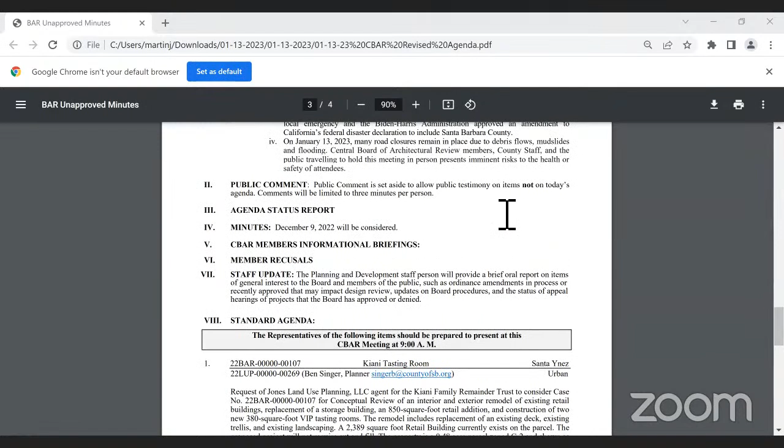Well, okay, so public comment. Do we have any member of the public who wishes to address the board regarding an item that is not on today's agenda? Please raise your hand if you have a public comment for anything not on today's agenda. I'm not seeing anybody.

Okay, can we do the agenda status reports? We have received no request to continue. Okay,

Let's take a look at the minutes. I'm pretty sure I can share my screen for that. One second. And while you do that, I'm going to see if I can track down Lisa.

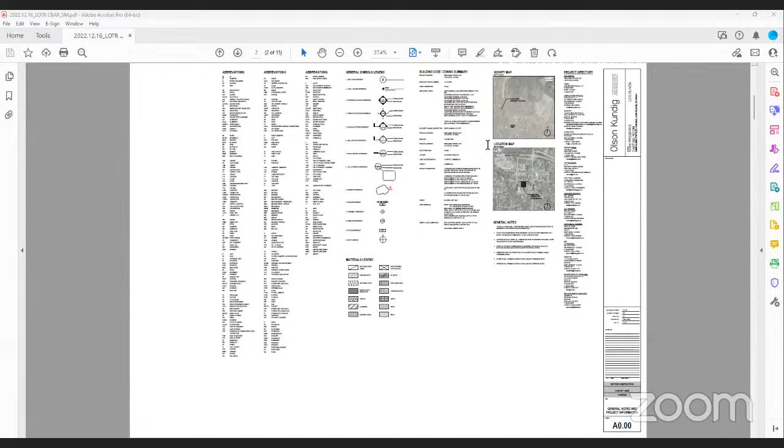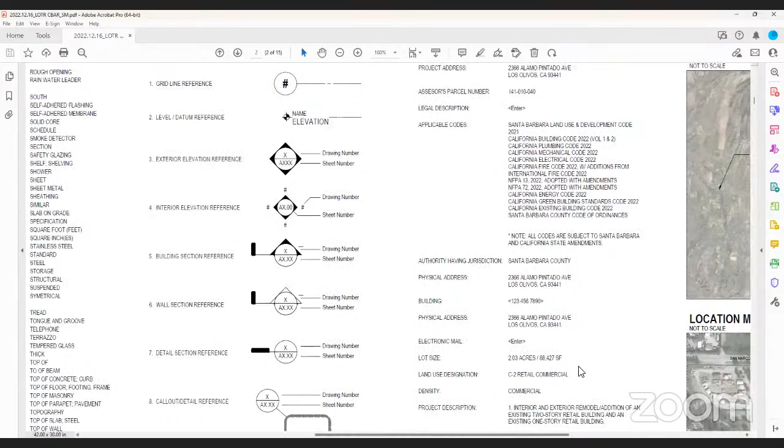Will do, thank you. All right Brett, take it away. I think Brett wants me to speak. I'm Edward Lalonde, principal and architect here at Olson Kundig, so we're working on the design of this project. If possible, maybe zoom in to the vicinity plan, that second map, or sorry, the location map rather, just to locate this project for those of you that maybe are unfamiliar. Brett gave a pretty good introduction of its location. We're dealing with two buildings here, and maybe to speak to one of the comments last time, if you advance in the deck, or when you're ready, advance in the deck. So there's our Alamo Pintado, yep.

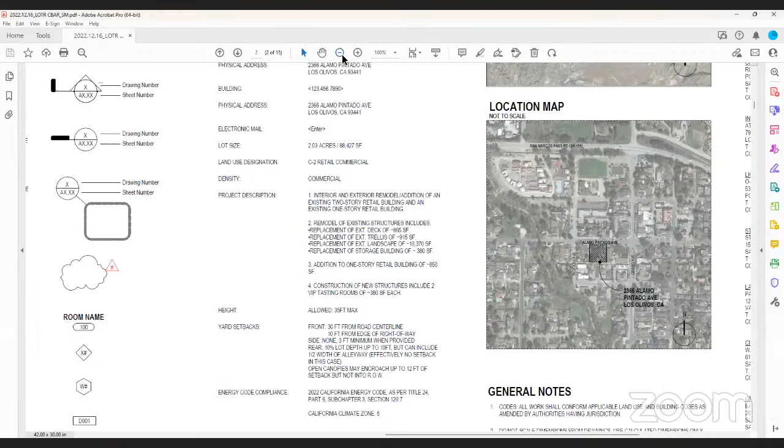Okay, let me zoom back out and we'll get one more. There we go. And as Brett said, we have made some additions. This shows the existing conditions, just for context, of the building.

What we're proposing is a tasting room on the east, and then the west will be a sort of deli cafe function, offering dry goods and things like that from the Kiani Preserve, another project our office is working on. The tasting room is for the winery program.

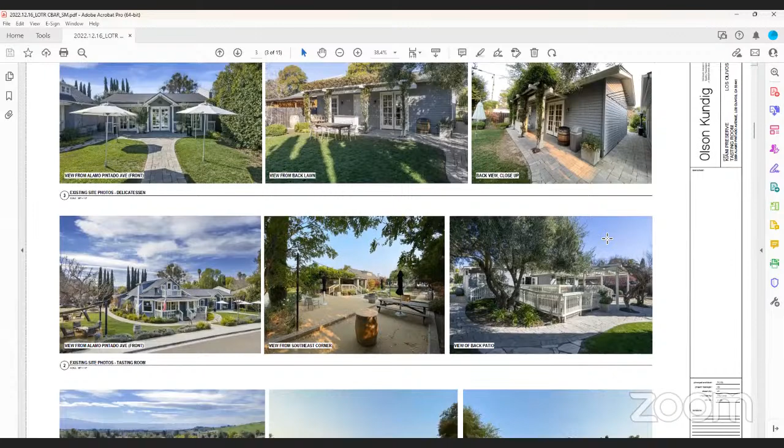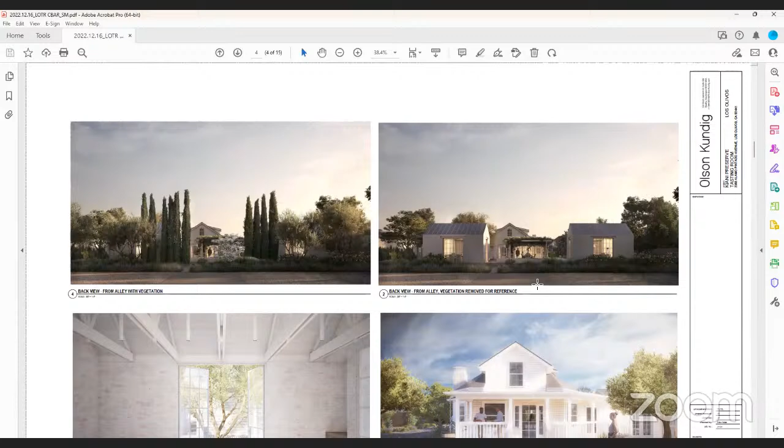In terms of aesthetics, and we do have a material palette in this deck, we're proposing painting the buildings white—they're blue right now—and painting the windows white as well, so it's a very subdued presence on the urban scale. The additional buildings in the backyard against the alley will be painted brick with a truss roof system, and something like a galvanized or zinc standing seam roof.

Again, this is conceptual, so the design is evolving as we speak, but this is what we're proposing. There's an intense landscape program, which we'll walk you through in a minute.

Just in terms of the concern of the glazing, we are glazing those buildings minimally for daylighting and also so patrons can experience the gardens. As you can see from the illustration on the upper left, those are largely blocked by plantings, existing and proposed.

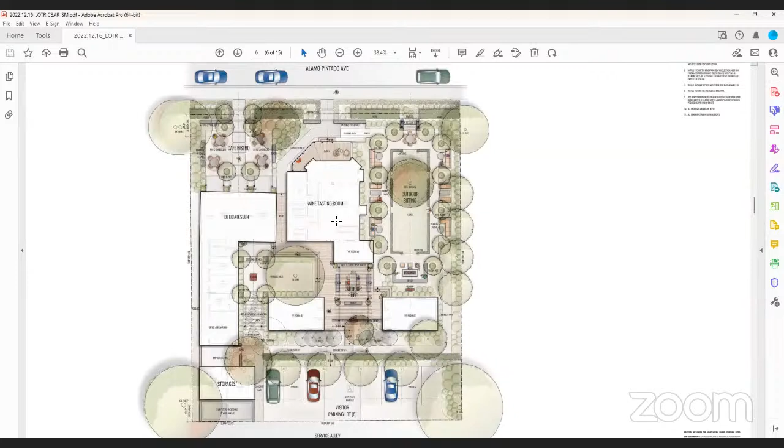Do your architectural site plans show the difference between proposed and existing? Oh yes, thanks for reminding me. If you zoom out, I meant to actually start there. Let's go to the architectural plan, flip through or advance through the set here. This shows some of the planting concepts. And we can flip back here if we like.

Okay, do you see the key plan there in the far right, in the title block? Over here, yes. If you're able to zoom in there, this shows in dark gray is the existing. Let's see, shoot, let's do this. I don't know why I drew a square, but there you go.

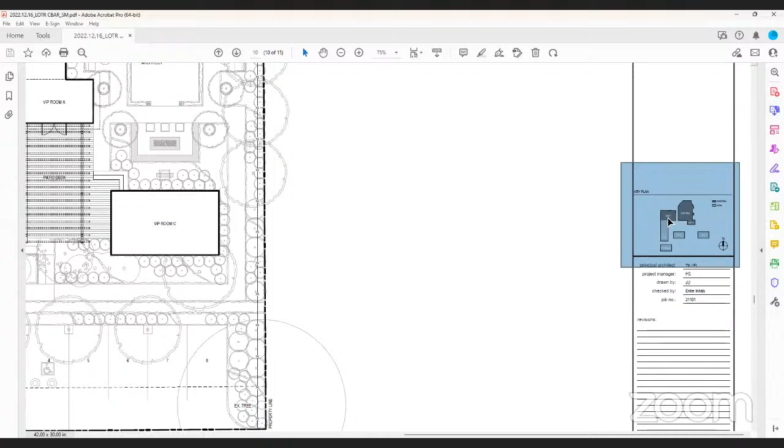So in the light gray are the additions. Okay, yeah, so I apologize, I meant to start there. This portion of the deli is existing. The wine tasting and VIP A is already there, right? Yes, okay, all right, let's zoom back out.

And we are looking at the entry awning of the deli. Next time we come to the board, we'll probably have a solution for that. That is largely driven by the need for septic for leach field.

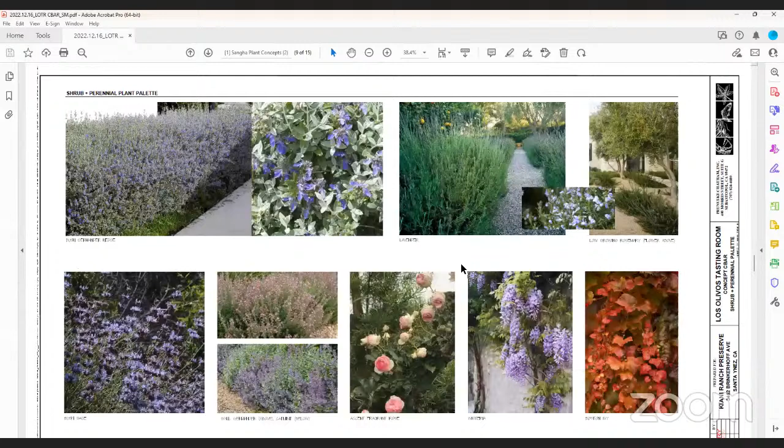Probably some citrus. And then here's the rest of the, yeah, a lot of fragrant plantings as well. Grapes. There's an existing grape that we're going to try to reestablish when we replace the trellis.

Do we have any quick questions from the board before we call for public comment?

I have a quick question, Bethany. Yes, Denise. Hi. What is the tree that will be removed? There's a large, that large tree is, I think it's a pepper tree now. And this is still in discussion, actually. We're looking, I believe it's going to be replaced with a persimmon tree. Or walnut. Any other questions, Denise?

Just real quick, is the south parking lot considered to be sort of a minor entry to the campus, to the wine tasting garden and all of that? Yes, it is a secondary entry. That's the intent, that most patrons would be entering off the street. But there is still accessible access through that shifted axes ramp, concrete path onto the deck.

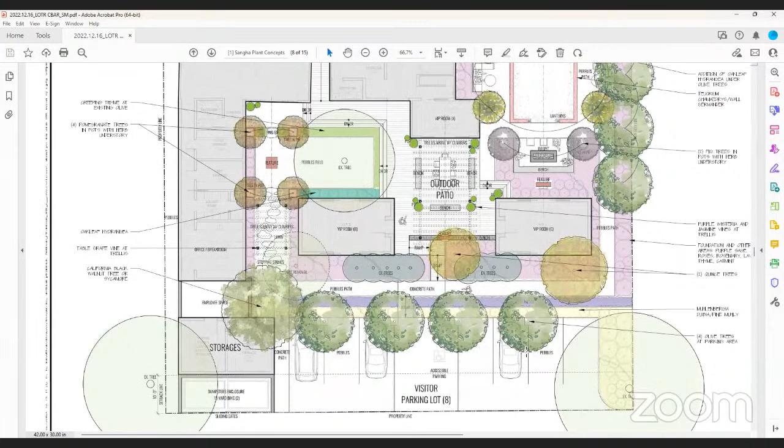Any other? Yes, Cass. Is it the existing Italian cypress? Is that the gray existing trees? Is that them there? Yes, that's correct. And they're staying, all of the Italian cypress you're intending to keep? Yes, we are. And then also, could we go back and just see the photographs of the surrounding area, the context of the properties across the street and adjacent?

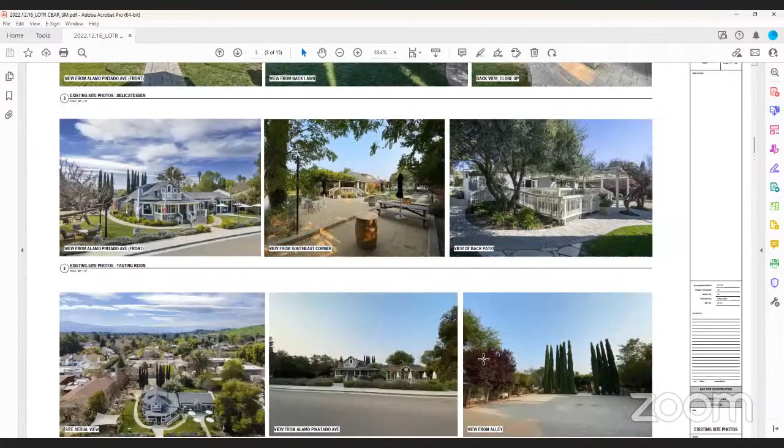I don't think we have that. Oh, we don't. Okay, there were these images. Is this what you're asking? Okay, yes. So this is adjacent here. Those are the Italian cypress in the back. This is the Grange, right? Yeah, I got it.

So the intent is, maybe you could confirm, this is open to the public and people can come in and partake in all these various things you have, the deli, et cetera, the wine tasting, and purchase whatever they want and then come out and be anywhere in the landscape. Is that the idea? Yeah, yes it is. Okay, great, thank you.

Anybody else? Board members? Okay.

Jonathan, will you do public comment? Did I lose you, Jonathan? If there's any members of the public that wish to make a comment on this, could you please raise your hand? I'm not seeing any. So I'm not seeing anybody indicating that they're wishing to speak on this item.

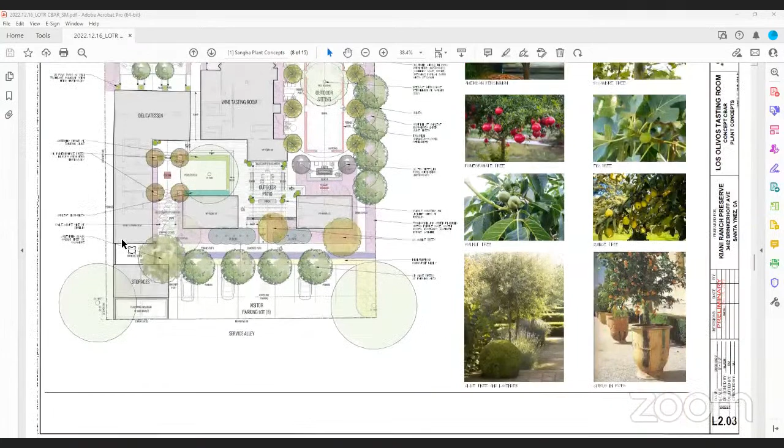I like the combination of a cottage and then some of the more contemporary elements you have, particularly on the south elevation. We are in town here, so we're not out in the country on top of a hill, so the light leak issue is not as much of a concern, but it is a concern nonetheless, so I'd just remind about that. But I think it's really nice overall - I like the direction you're going.

Thank you, thank you. Okay, Robin and then Puck. I concur with both Lowell and Cass. Okay, Puck?

Did we lose you, Puck? Sorry, I was having trouble with my audio and my Wi-Fi. Anyway, no, I think - I just concur with everyone.

I'm looking forward to this, and I'm a little on the fence about the white, as I feel like our town is sort of turning - every building seems to be turning white. But in this case, the way it's arranged and everything, I do like it. So looking forward to the next steps.

Okay, Denise? Hi, yes, I think it's beautiful.

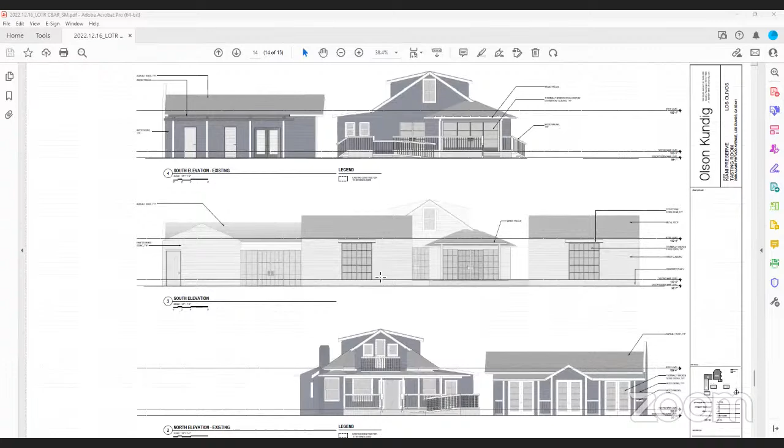It's such an improvement to what is there. One thing I will mention, though, is that visitors parking in that south parking lot might be a little confused about how to get to the front door. I see there's a little ramp and then an entryway, and then you can go around, but I'd suggest looking at whether the wayfinding could be improved a little from the south side.

Okay, okay, thanks. And Alan? I have nothing to add. Thank you, how did I know that? All right, Nicole, I'm going to try and recapitulate a little bit here.

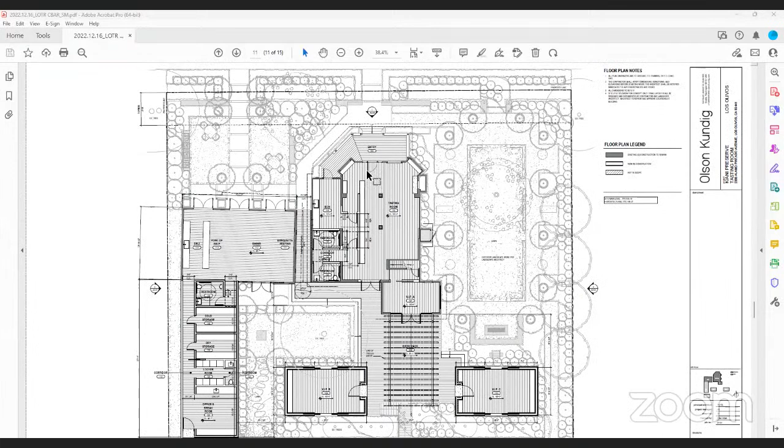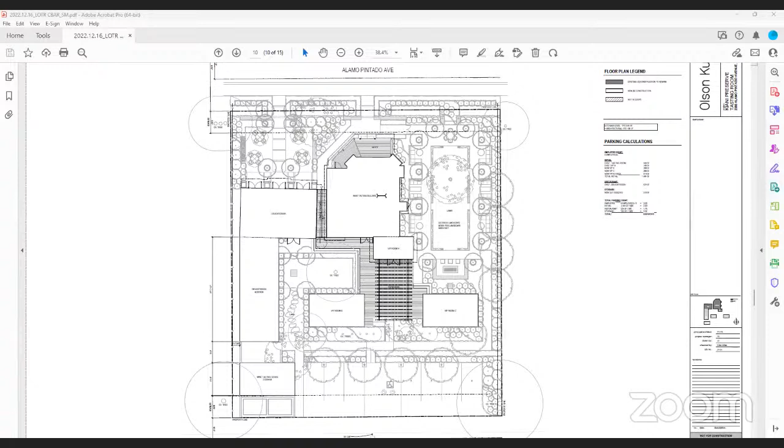There were comments about whether the hedge was perhaps too visually restrictive, making the project feel very private and not actually a business kind of a thing. That's my spin on what people said, adding some of my own comment in there. We appreciate the improvement to the architectural design, specifically the elimination of the dormer and balcony - it's kind of brought the building back to its roots a little bit, which is very nice to see. There's some ambivalence about the color, so that's just a general comment. I don't think there was any strong direction from anybody's comments, but just some concern, as well as some support, just to see where they go next.

Also keep an eye on your fenestration and the amount of light trespass you have as you move forward.

There was a suggestion to take another look at the wayfinding from the south parking area. I know the site offers some challenges, but there might be a better way to take control of that, make it more obvious and less visually restrictive, so people can see where they're going. That's always good with wayfinding.

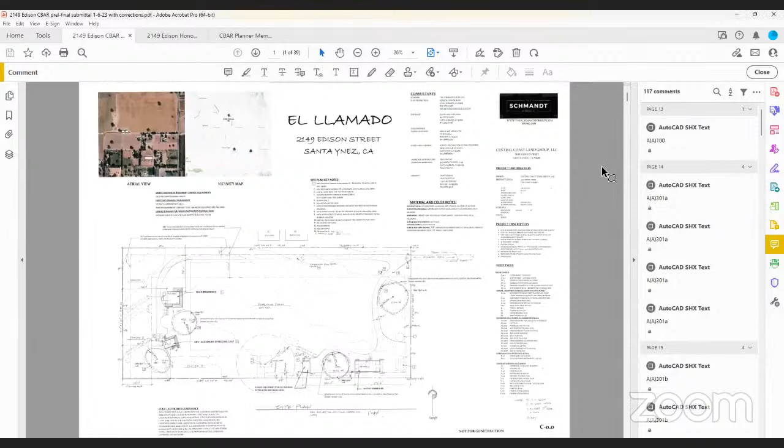Alright, so let's go back to that. We have somebody here for this one? Yeah, Greg Schmandt here. Hello everybody. So basically, we saw you about a month ago.

This is on Edison, an interior lot. If you want to zoom in on the aerial there — it sits back off Edison, there's a 10-acre parcel in front with an easement that goes back to this parcel. It's surrounded on the north side by a big ag property with two white buildings close by, which are like storage or something — and that's on the other property, correct? Correct.

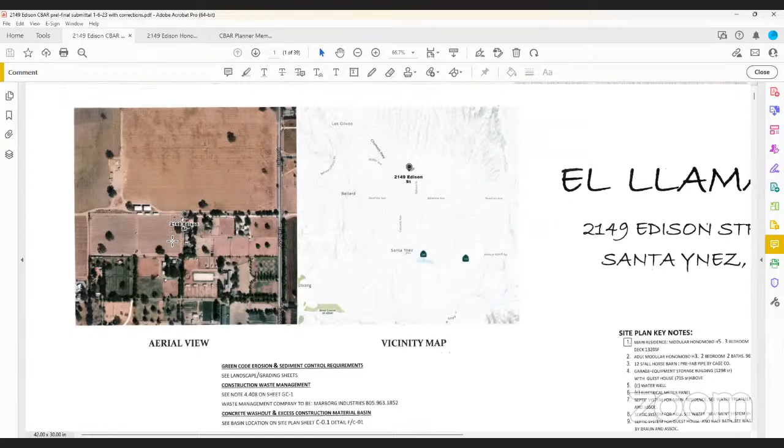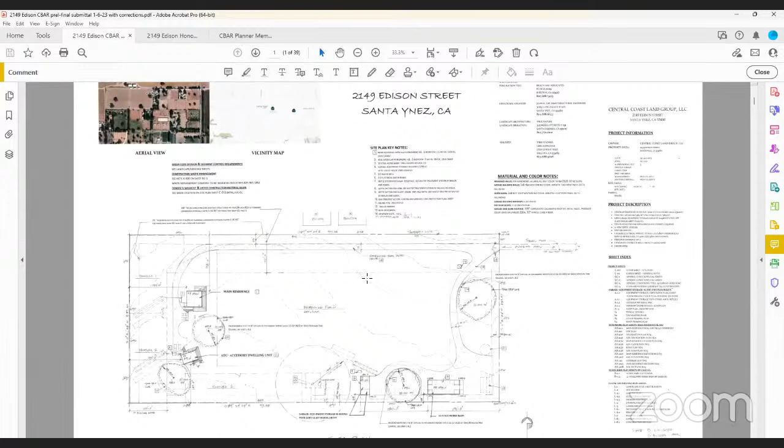So as you look at the site plan, on the north side, if you remember, we have a 25-foot vegetation buffer and a 100-foot no-build zone, which are depicted there. The two residences, or the two buildings, will be to the north side, to the west side — far to the west side — well off the property line, kind of surrounding the existing oak trees.

Okay, and then on the south side, there is a proposed 12-stall barn and a garage equipment building with a guest house loft. Correct — a little survey, that's a survey. And then here's the garage with the loft, guest house.

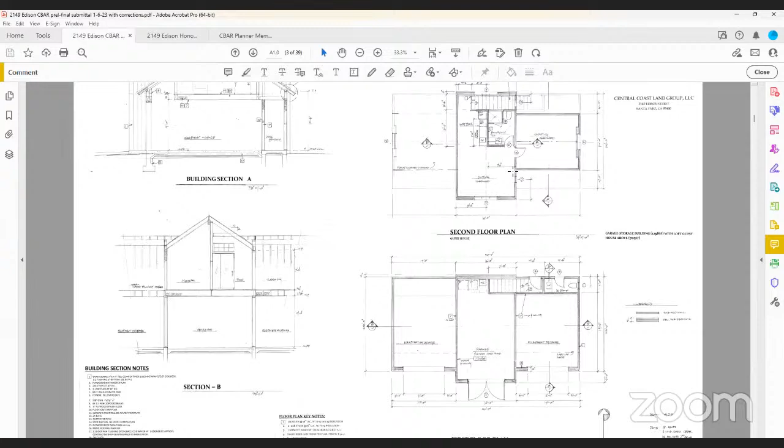Floor plans — basically there's open on the two sides of the lower level, kind of has a carriage door in the center one. Then above, it takes a staircase up, which is interior, and it has a little loft sitting room and a little sleeping area. Okay, and then the elevations are right there.

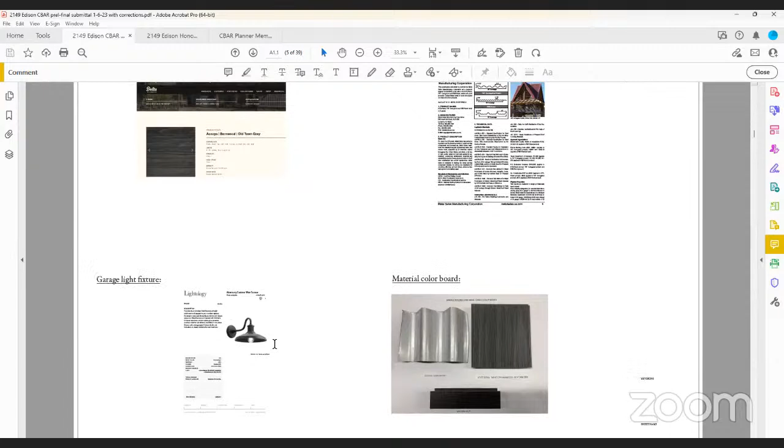So basically it's like a 1x8 tongue and groove. There's a material board, I think the next sheet, that's kind of a darker grayish color. It's actually an Accoya wood brand that we're going to use, so it's on the darker side, going with a corrugated galvanized roof, and it has bronze colored window frames — you see the lighting there. This will be the same color palette as the roof on the stables too. The two modular units — those plans should be coming up after all this stuff.

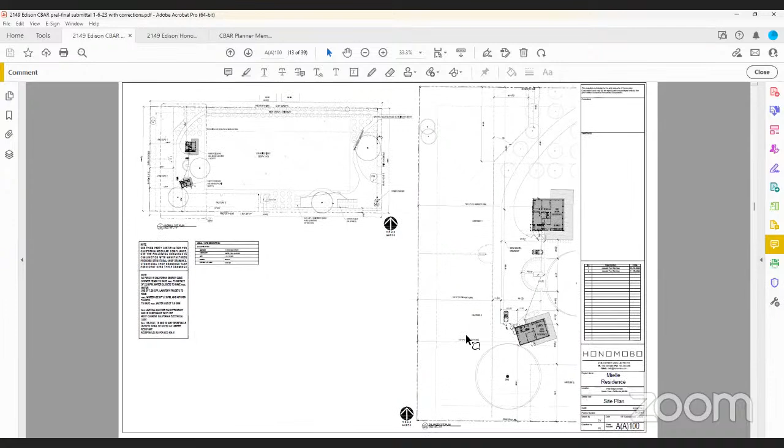So the one comment last time was needing some shade, or to look at shading options for the 2 units there. I believe Kim's the landscape architect, so we came up with a sailcloth approach, which is on L5, towards the end of all these sheets here. They give the deck area some shading. I don't know if we want to skim all the way down to L5.

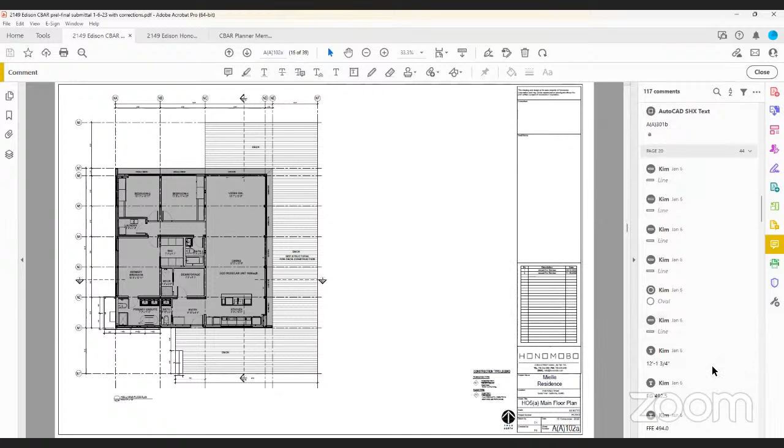Oh, they're not coming up. Oh okay, yeah, we could just, it's almost the last 5 sheets of the whole. For some reason the electrical plan got - there's the barn.

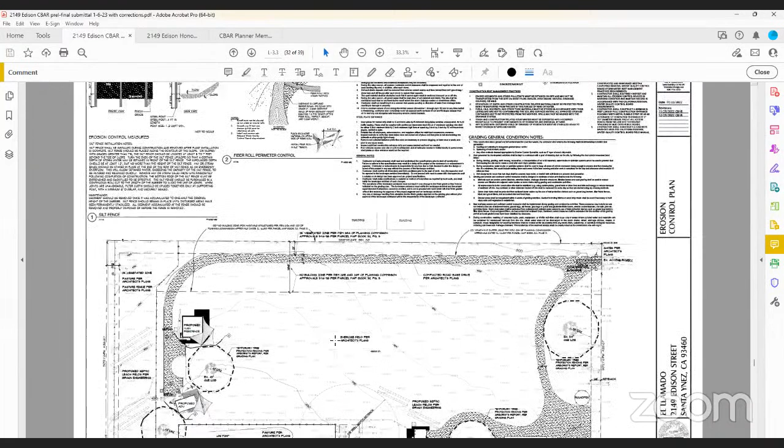Okay, more of the existing there. What is that? That's the grading. Yeah, this is more stormwater. Okay, here they are - yeah, so it's a little bit bigger layout there.

I don't know, Kim, if you want to chime in. Sure - we're looking at doing a bronze powder coat posts that would support these sails, and the fabric we've chosen is the gray. It's a warm colored gray, sort of to match the rest of the palette. And then the rest of our palette is the gravel, the Felton Gold, which has a lot of browns and grays in it, not the bright gold one, and then a paver for the walkways up to the deck. So we're all staying in that warm gray and earth tone colors.

And then we've oriented the shade structure, the shade sails, on the southeast side of the homes. Of course the homes themselves will provide the afternoon shade, but we're getting that midday morning shade. So we have these pivoted up so that they're low on the south side and raise up towards the northeast, giving it a little dynamic feeling there, and then helping with that shade with the sun angles.

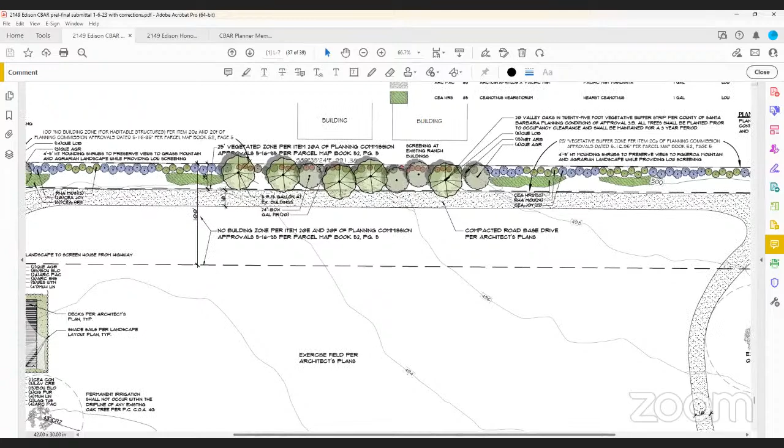And then we have the vegetation drops down to enhance the mountain views there, because we can see Figueroa Mountain and Grass Mountain from this property, but we're also providing that level of screening from buildings and things happening on the site. And then if you pan down, straight down, there's a little bit of landscaping around the barn there.

Sticking with a more native and Mediterranean plant palette, very loose, some more oak trees in that area, the Bouteloua grasses where you get that sunlight, the Arctostaphylos ground cover, the soft gray Pacific mist, and then bringing in some toyon along the property line. There's some buildings and solar panels back there that we're screening from the barn and the guest house, so just very informal.

We have a small gravel seating area near the entry to the guest house with oak trees to provide shade, and a couple of the Lagerstroemia, the crepe myrtle, flanking either side of the barn, anchoring those.

Some color there, and over to the left we can zoom in on the guest house, carrying that same type of palette with native grasses and native shrubs, some lavenders, ceanothus, the Arctostaphylos manzanita around there, and again some Lagerstroemia, placing some of the oaks to the outside, the coast live oak, evergreen, so we're screening from that Highway 154 corridor, along with the valley oaks along the perimeter and the landscape buffer.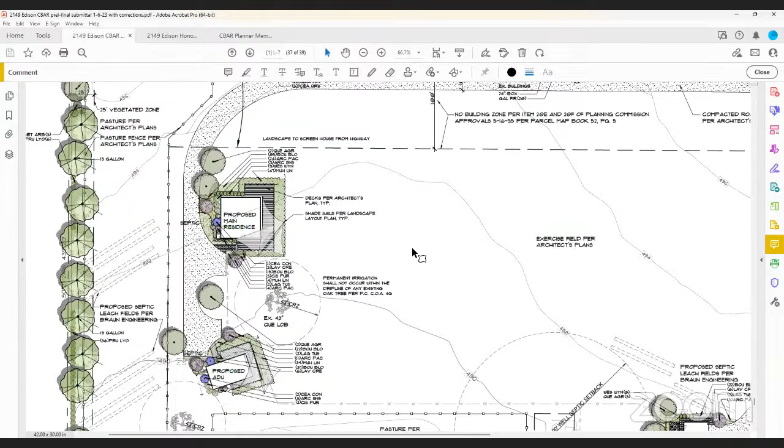Same oak trees, providing the screening and some afternoon shade, and the grasses and manzanita and ceanothus, that sort of thing, a few cistus in there, so we're getting color throughout the year and interest in the light with the seed heads in winter. That's the basic planting there, keeping it simple and low water use.

Okay, and then what do we have next? I think the rest is all details on planting and irrigation, and then our arborist report.

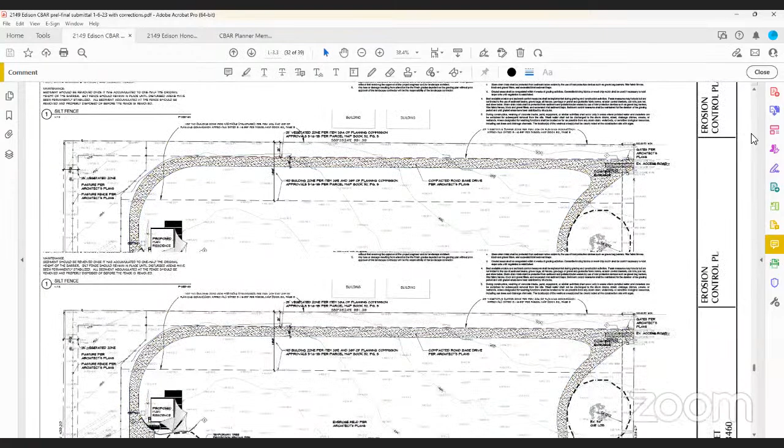Bethany, I have one question. You calling on me? Yes, Cass. Okay, could we just go back to the elevations of the proposed residence and the ADU? Getting there. Thank you.

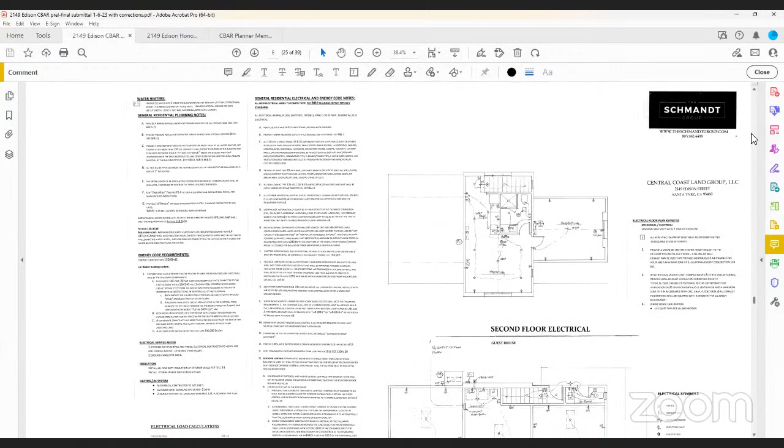Thank you. Okay, Denise, was it Denise? Yeah, actually I found it. I had a question about the stormwater in the pasture, but I see the note there, so I'm good. Thanks, okay.

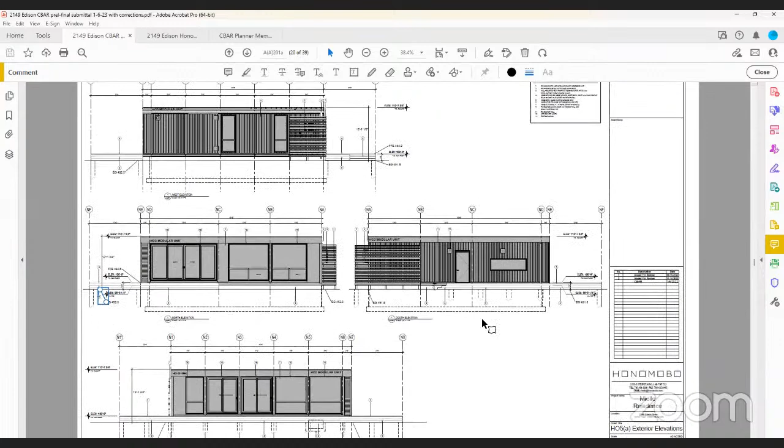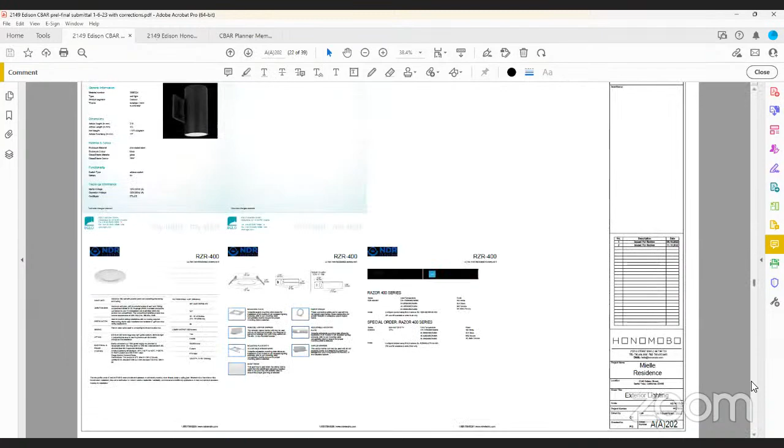I just had a question about the shade sails. So these are permanent? They can be taken down in the winter. We are looking at the tension so that it can handle the wind load, but they could be taken down in the winter. They can handle the wind load in the area.

And are you working with a specific manufacturer or something? Yeah, Derek over at Got Shade, he does engineering, manufactures and sews, and does the installation, the whole nine yards. Okay, I was just curious because there is quite a range of quality in shade sails. Correct, no, he does really good work, we've used him out at the university and on public projects, so they're very good quality, long lasting. Okay, that was the question.

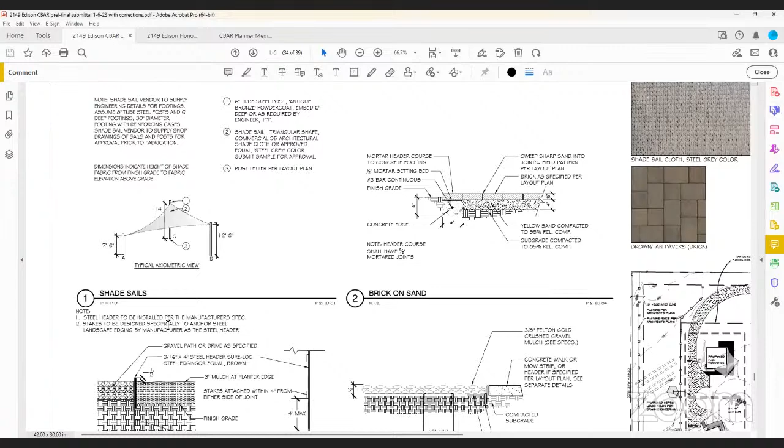Okay, sure. Thank you for this presentation, really appreciate it. My comments are that I think the garage with the unit over it is pretty successful. I think it has a good feeling, and as I said before, it feels like I'm in the valley and feels appropriate. So I think that is a successful piece of this.

The house and the ADU, I commend you for using a modular type system. A lot of people are doing that these days, and we're seeing them come out. I think you have an opportunity, but it still looks like a modular to me, and I'm not convinced that the sails are the best solution.

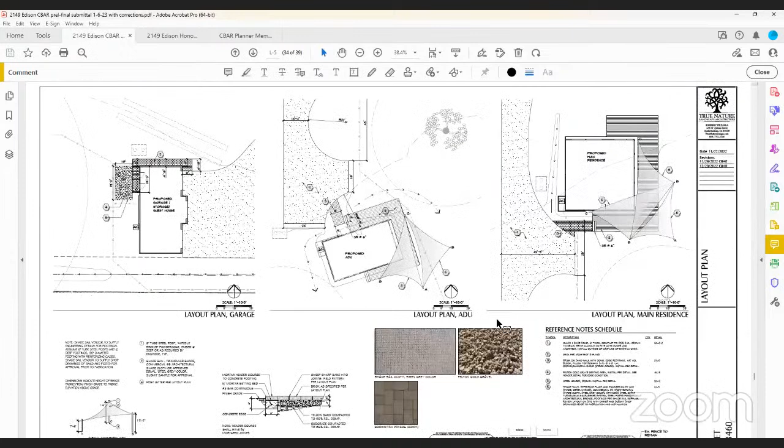I would suggest you may consider the possibility of helping to transform those boxes into something that feels more like a ranch house, by considering building a covering that wraps around the structure - not a sail structure, a roof structure that would wrap around and cover the porches. Just think about that, it's very traditional, we see it all the time. It might be a way to completely transform these little boxes into something that feels more like a substantial ranch house. So that's my only issue with it.

It just feels like it needs more detail like that to help it feel like it belongs up in the valley. Those are my comments, thank you. Okay, Huck?

Geez, my mute button keeps, I don't know what's going on with it. I appreciate, I'm just a little concerned since we don't really have any elevations showing these shade sails. I think in the valley, you know, they really do - sort of like Arizona - take a beating. I think the color's fine, they won't look quite as dirty.

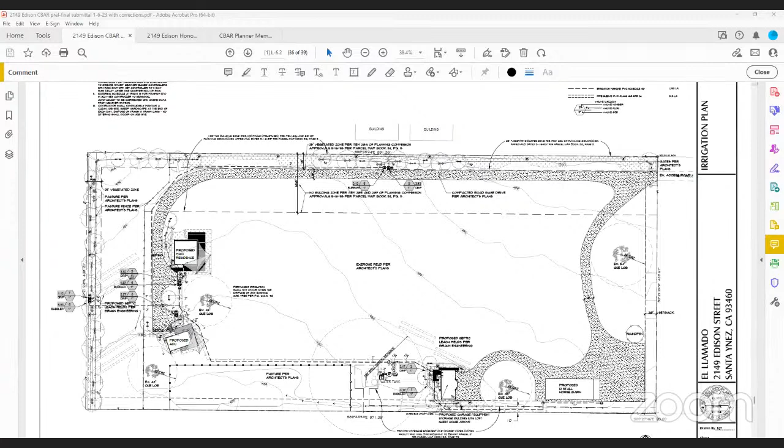Let's see. Come on. Let's go to here. I think this is the next one.

This is the next item, which is, I think, the Skyline Trust. Is that correct? Am I on the right one? Yes, Skyline Trust, 22, item number 4, 22-bar-74. Actually, Bethany, it's right, Brett - I think you're on number 3. Okay, thank you, I'm just having quite a bit of a day. Sorry, guys. No problem.

Bethany, this is Tina, can you clarify how you want the last project to return? Board, how do we need the last project to return? I would continue it - you want further conceptual? Yes, that's my one, it's agendized for prelim final. I was going to say continue for prelim final. Yeah, that would be how I'd do it. Yes, yeah, okay, I agree. Thank you.

Okay, let me get the right one shared here. Boy.

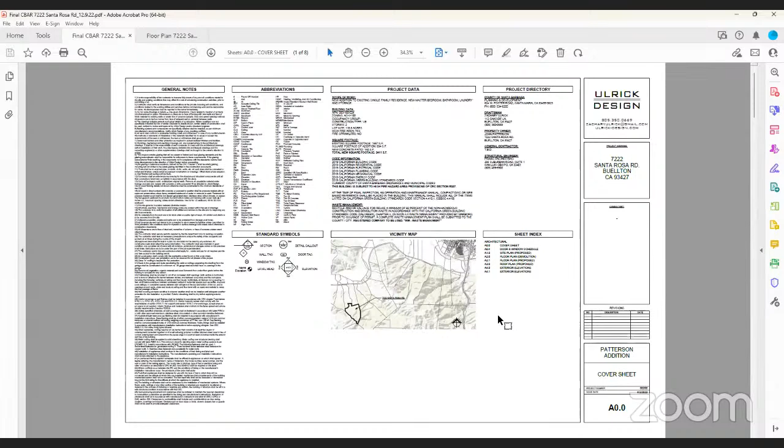Were there any members of the board that did not see this project? We were here about a month ago. I'd love to be brief because the last one was so long. We were told to return on consent, even though we're not agendized for it. It actually says, if you read the item, it says for preliminary and final review. At one point it said on consent, but yeah, sorry, that was my mistake. It was supposed to be on consent, but by the time we realized it, it was already too late, we'd already done the agenda, 72 hours. Yes. Mhm.

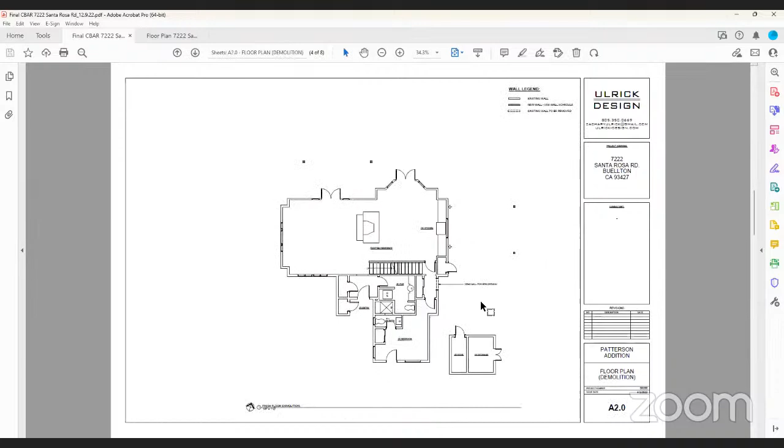Okay, so this plan, this view is great. We'll jump into, I think, the first item, which is the topography. I've got some finished grade callouts there. If you zoom in, it's demonstrating the fact that it is hillside ridge. We definitely understand that it falls within the jurisdiction of the Hillside Ridgeline Ordinance.

I think what we were asking you to do, Zach, was to demonstrate that there wasn't a 16-foot fall within 100 feet of any point of the structure. Right, and let's see what you got here. Yeah, so that's a 20-foot fall within 100 feet, so it does trigger the ordinance. Okay, perfect, that clarifies that.

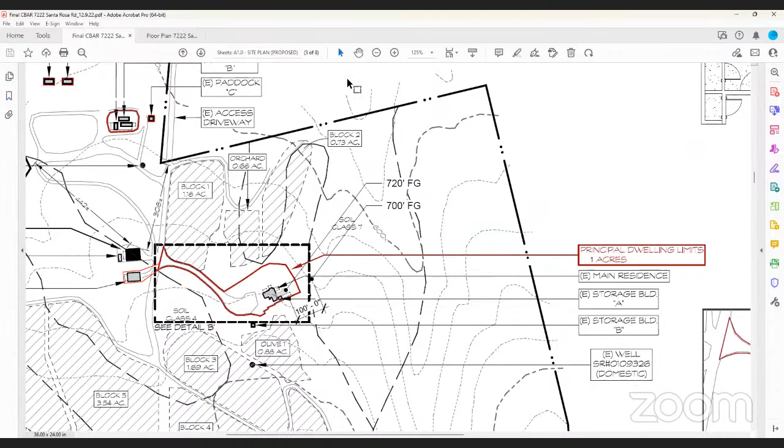And then if we jump to the floor plan, which would be the demo plan, and then just go one more. You can see the finish note there that I've put a bold rectangle around: finish materials, colors, and details to match existing. So that was one of our items there. And then the...

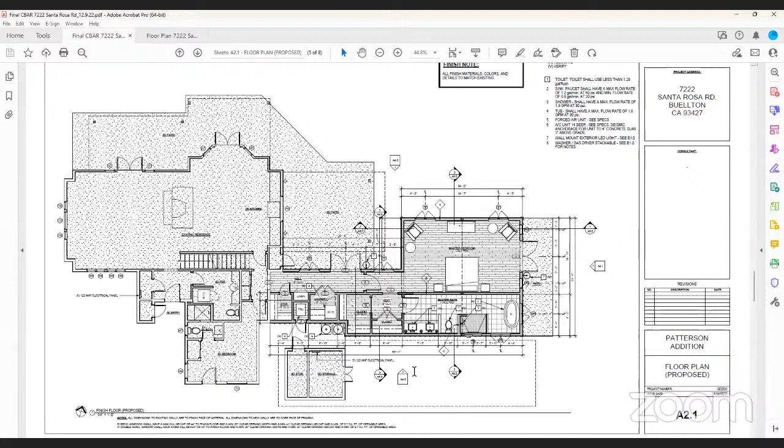Exterior elevations, if we scroll down a little bit, no changes to the roof plan. You can see the dimension there for the ridge height, I think it says 16.3. 15.3, yeah, 15.3.

Okay, so we've got that there, and then that note that you asked for also shows up here on the elevation, the finish note. Okay, and then the next page we've got the cut sheet on the light. Okay, so the existing lighting unfortunately doesn't match or doesn't comply. Right, so our new lighting will comply, and I have a note there saying that we'll be replacing the rest of the lights to match. Okay, this new fixture.

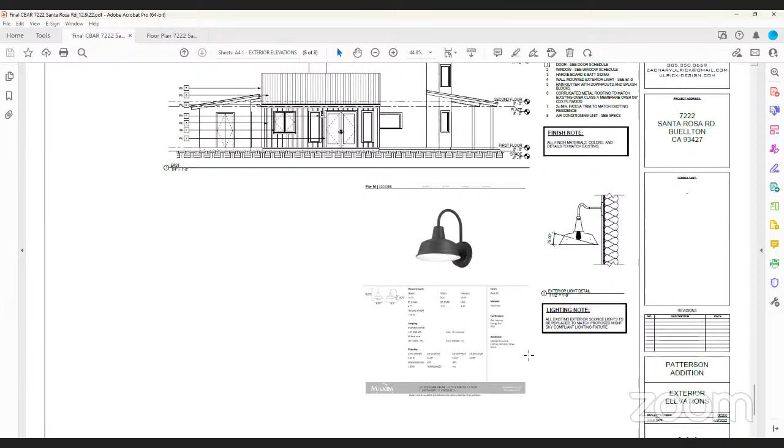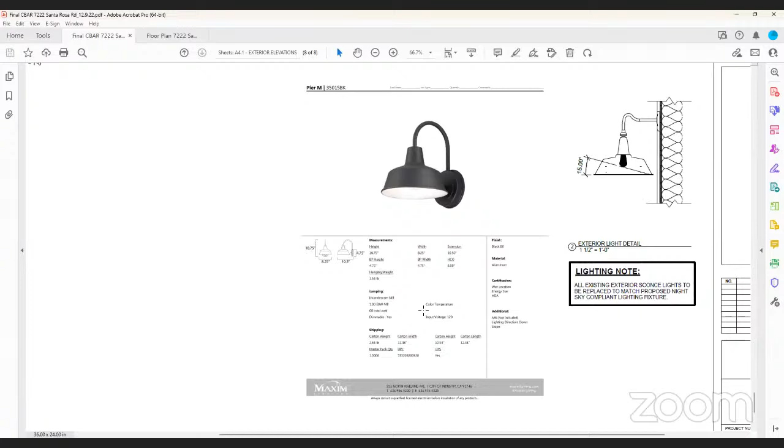All right, and I think that was all of the items. Do you have your 2700 for your lighting here? What's your lamp? Sorry, you're doing an incandescent lamp? Right, okay. You don't have anything in the color temperature. Would you be amenable to us if in our motion we placed a requirement of 2700 Kelvin for the temperature? Yeah, that's totally fine. Okay.

I think that's it, did that conclude your presentation? Yeah, I think that's it. We didn't, no, no changes, because the details, colors, materials, and everything are to match existing windows and doors and all that.

Okay, board, do you have any questions? I'm fine. Okay, I have one very silly question, I guess, if I could. On this elevation we're looking at the east elevation, in the background is existing, and then we're looking at the proposed in the front, right? Correct. And so we have a window back there on the existing, is that on the right-hand side? Yeah, that's the kitchen window. So the wall just goes right up to the left? There's a jog, if we go to the floor plan, there's a jog. Got it, it was just a curiosity. Thank you. No, I understand. So if you see the shape, there's a U shape with the patio area. Okay, thanks.

All right, Jonathan, you want to call for public comment? Yes, if there's anybody that would like to make a comment on this item, please raise your hand in the chat.

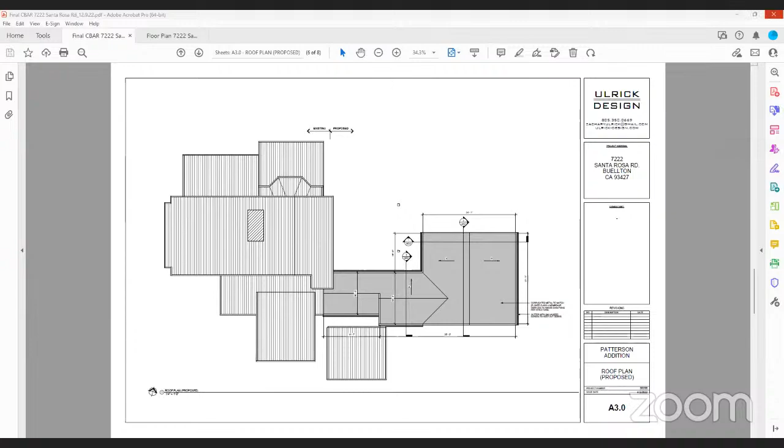Okay, I think the next one is Skyline Trust. Oh, no, that's the wrong one. Boy, I am just a train wreck today.

Yes. This one, no, that's the wrong one, isn't it? Hey Bethany, that is the correct one. This is the correct one, thank you very much. I just had an awful day today. Okay.

All right, so let me see. There were some comments, I think, from last time. Some members felt that the vents seem out of proportion with the roof. They appreciated the preservation of natural vegetation as landscape, and noted the structure appears to trigger hillside ridgeline requirements. Please have the planner confirm. No action was taken, and the project may return for preliminary review.

Do we have a planner here for this one? Yes, Bethany, that's gonna be me. Okay, and Alicia's here as well, as agent for the project. I will start off. I believe the plans are the exact same as the board saw at the last hearing.

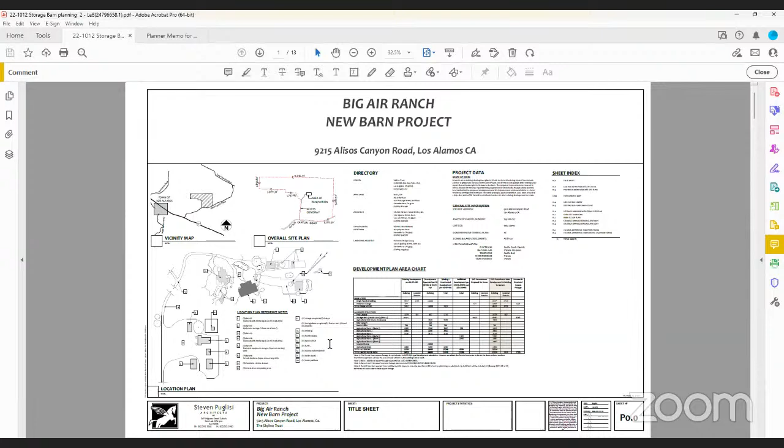This project is back to confirm that it does in fact meet the hillside ridgeline distance, so it is subject to those requirements. It meets it by about 4 inches for maybe 2 linear feet, so it's kind of just on the cusp of not meeting it. The applicants wish to return and request that the board either exempt it from those requirements.

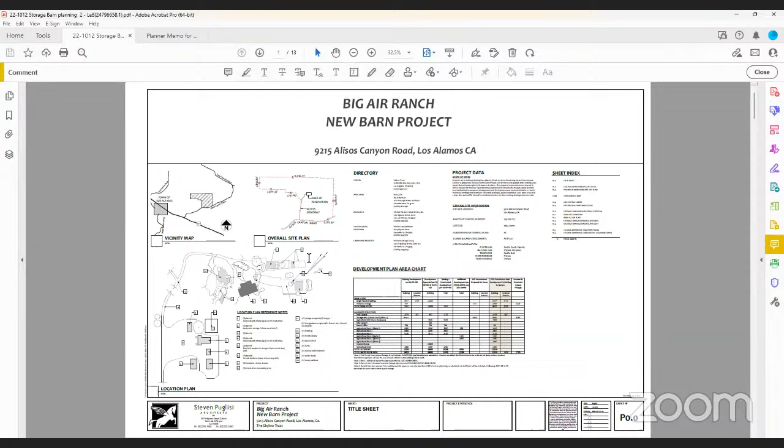So it's quite a distance back on the private driveway. And then, on the next page, we are looking to redevelop an abandoned, basically, tennis court area, the larger rectangle, and that's the location of the proposed barn. The other smaller rectangle is the existing garage, that's the residential garage. There's no garage attached to the existing residence.

So the idea is to expand that to a four-bay garage, and that shows the proposed location. The existing setting is very full with oak trees, a large agricultural property that the property owner wants to keep as is and not disturb any new areas. The idea is to just stay within this already disturbed area.

You can see some of the topo shown here, but let's go to the next sheet, back to the topo please. So that shows the larger topo of the area. We felt the best course of action was to verify or confirm the topo that was provided, because this was an older topo, but given the hillside and ridgeline concerns, we wanted to verify the area.

The only area of concern, which Ben Singer mentioned, is in the area between the corner of the existing tennis court and the pool area, the cabana, so on the other side of the building there.

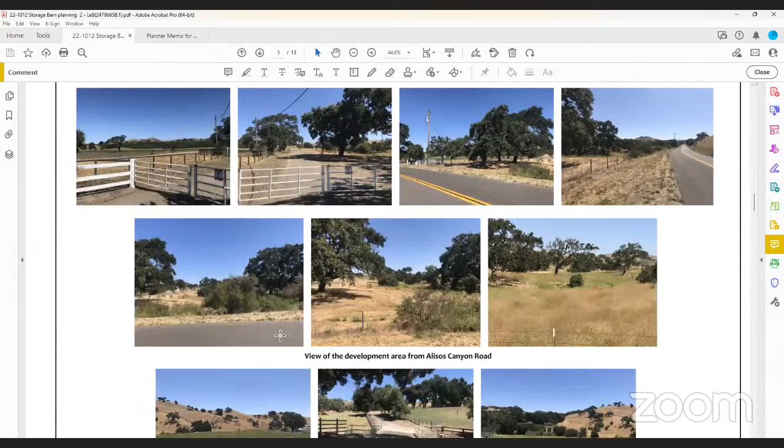This is a very open, spread out rural area. On the next sheet, I think, is where we've got the photographs where you can see what the view is from the road, so it gives you a sense of how far back this is. There are some rolling hills and several oak trees between Alisos Canyon Road and viewing that site. And there are larger hills behind this development envelope, so there's no breaching of the skyline for this proposed barn as well.

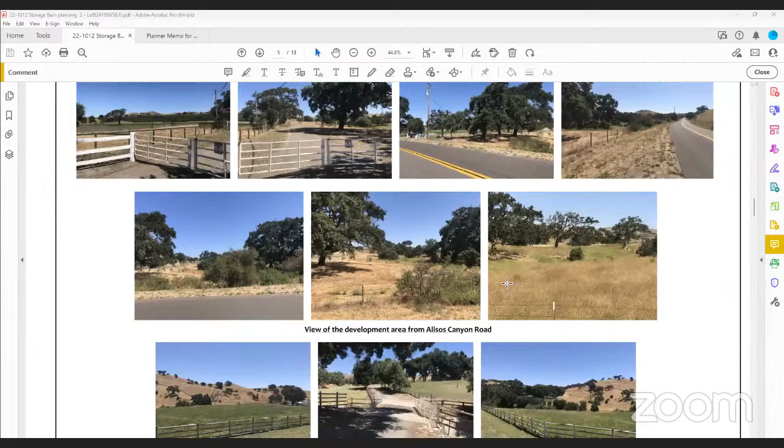Okay, so then if you continue on, you'll get into the layout. Oh, so sorry, well those are the existing photos, if you would like to see, remind yourself what's existing. And this was the area that got chopped off, that wasn't part of your submittal. Yeah, that's not part of what we're proposing. That area that you were just circling is where the existing cabana would be, where that minor drop is.

Yeah, okay, so it's just an open format storage barn, and the garage below. There's access on one side by stairs and access on the other side by a proposed driveway to be able to get equipment in and out of that barn. And this is the access end down here, yeah, right? That's the access end, exactly. And that's this here. Yes. Okay.

And that is the rear elevation. And then the other side with the stair access. This is the side that faces the existing cabana and residence.

Okay. You guys need to make bigger type. Bigger type, yeah. This is okay.

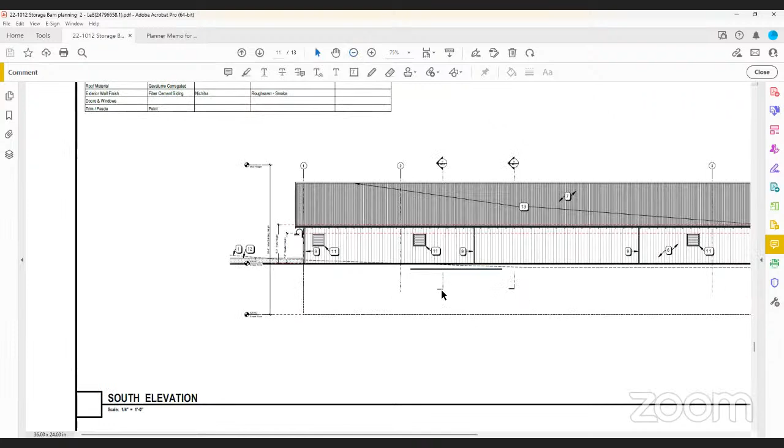And just FYI, what is the height on this side from here to here, to the ridge line? 18 feet 9 inches to ridge line. Okay, it's handy to dimension that. Yes, I again realized too when we resubmitted these plans that the height dimensions had not been added. And it's a 4:12 roof pitch.

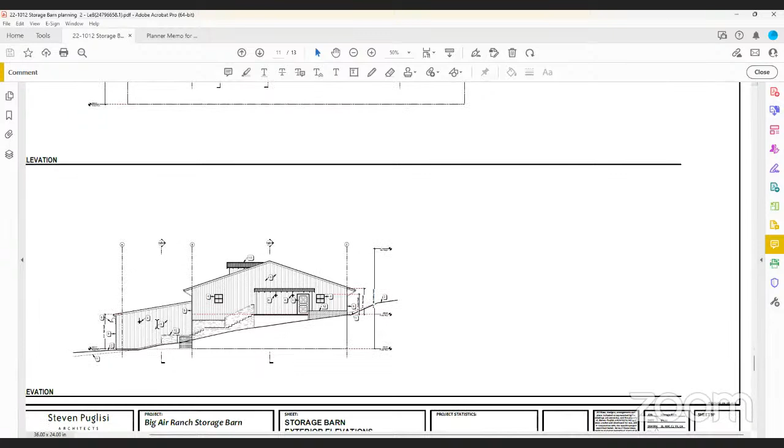Okay, can I ask a question, Bethany? Yes. Are we making decisions on items that were not in the packet? No, you have seen, except for a brief 2-second flash, you haven't seen anything that wasn't included in the packet. Including the dimensions that were noted that were not included? The plan that she's talking about, I can show it to you if you want. I'm the only one who saw it, aside from Jonathan, and no, I'm not making a decision based on that.

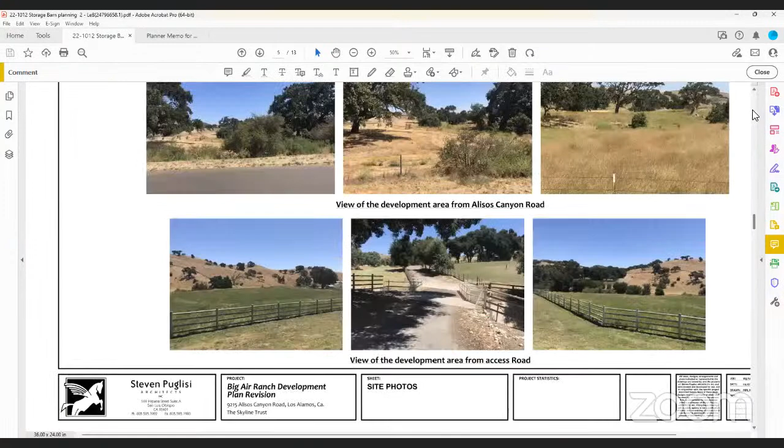I asked the applicant to explain this. She was talking about an exhibit they had prepared that showed some additional information, a 100-foot circle, and showed the 16-foot drop and where it occurred. Based on your statements, ma'am, you said it was just this area right here. Is that correct? Yes, that's correct. And at that point they have a drop of, what was it again? 16.01. So they're just over the trigger of 16 foot within that 100 foot. Does that answer your question, Alan?

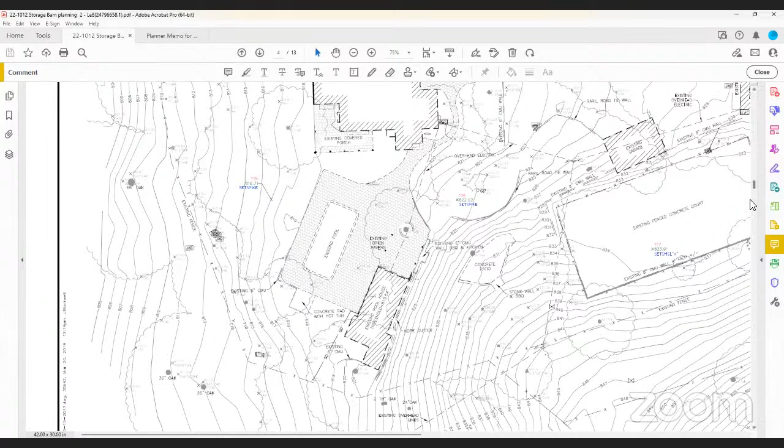So what I'm looking at, I don't remember of all the documents I looked at. What I'm looking at right here was something that was in the original packet that was sent out, correct? Correct. Okay, you've answered my question. Thank you. Yes, this has all been posted in Box. We're not looking at anything that wasn't. Although I did ask the board if we wanted to look at it, but then we got distracted and started looking at what was actually submitted, and we never looked at the document that hadn't been, except for a brief 1 second flash on the screen.

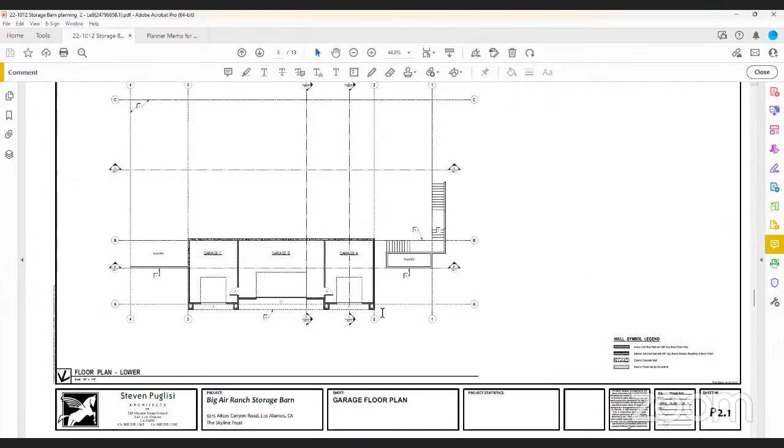Madam Chair? Yeah. Is it possible that we could allow the applicant to finish the presentation before we start getting into a lot of questions? Yep. Thank you. Thank you. Yeah, so you can just continue through.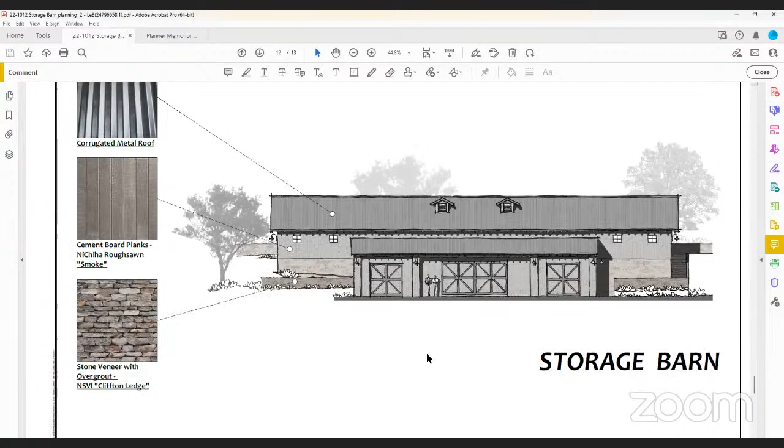And the last slide I had here was just something we had gone over last time, that this project had been before you before as part of a larger project where they were looking at the cabana as an ADU and also some significant changes, actually demo and rebuild of the main residence, which the owner has decided not to do. So you looked at something very similar to this in the past. The upper one is what we're looking at now. So that was just a little reminder. This was what had gone through conceptual review before, exactly. And then this is what you're looking at now. That is correct, your current proposal.

Okay, yeah, exactly. Okay, I'm going to just take a quick look to see if the architect was able to jump back on. Unfortunately it doesn't look like it, so hopefully I'll do the best I can if you have any questions. Well, I think we can, let's go ahead and just continue, and if the architect comes in and there's a question or anything you need to refer to them, then we can deal with that then. Okay, when we get there.

All right, board members, are there any questions before we go to public comment?

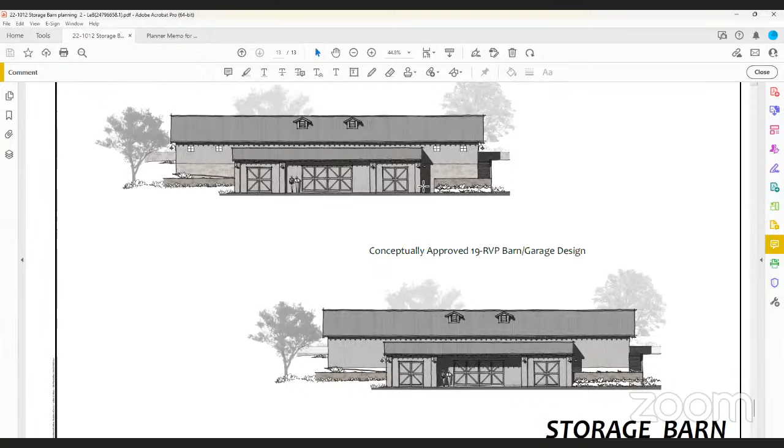Okay, I have one quick question. Can we look at the plan on this elevation we're looking at right now? We see that the doors are recessed back further and you've pulled it forward. Was that to gain some space inside that you needed? Yes, before it was recessed, just kind of an open covered area, but now those have been turned into 2 bays, so that's officially a 4-bay garage. Okay, thank you.

Mm-hmm. Any other questions?

All right, Jonathan, can you do public comment? Yes, if anybody has a public comment on this item, please raise your hand in the chat. Seeing none. Okay.

Board? Does anybody want me to go first, or does anybody have a burning desire to go first? I'd be happy to go first. I think this is a very nice project and I don't have any issues with it. And those are my comments.

Okay, because in the previous comments somebody had said the board gave direction about these vents on the top of the roof, but they don't bother me. I think there's lots of little tweaky things you could do if you wanted to, but I think the project is well executed, and I don't have any further additional comments.

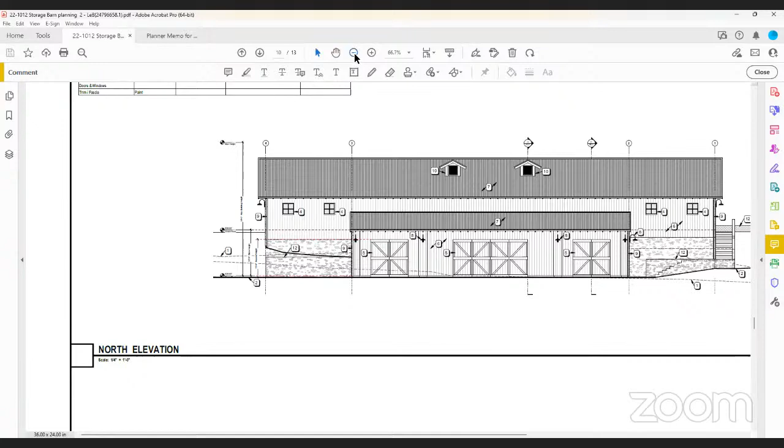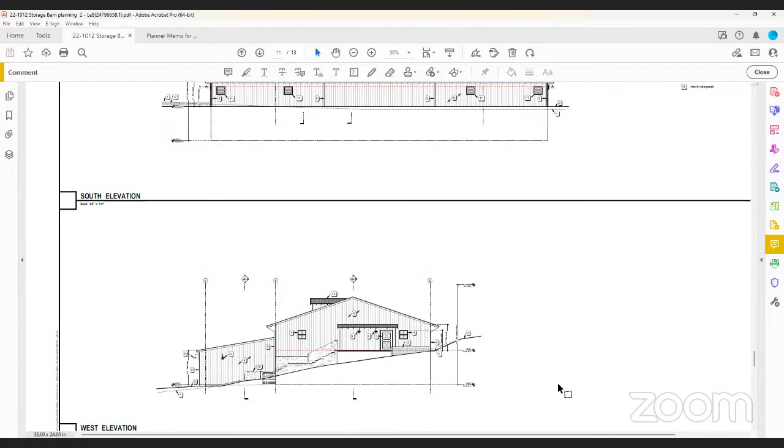I'm just going through a bunch of things here for Nicole, who's taking our notes. You've got your color board, you've got your notes calling out your materials—yes, perfect, those need to be on there, colors and materials. Then you're going to need an actual physical color board. It can be done just like this with the samples put on it.

We prefer an actual sample or an actual paint chip where at all possible. The color board, once you get your final approval, is a physical board that you submit to the county, and it gets stamped and returned to you and goes out on site during the construction period, available for the person looking at compliance so they can hold that sample. This is why we like physical samples rather than pictures—they're going to hold it up to the wall and go, yeah, that matches, or no, it doesn't.

So that's something to think about when you prepare your color board. I've been telling people recently it's sometimes a good idea to prepare two—you leave the second one, which also gets stamped, with the planner. Then when you lose the one on site, you've got another one that's already stamped. Those are just things to think about. You do submit a color when you prepare that physical sample color board.

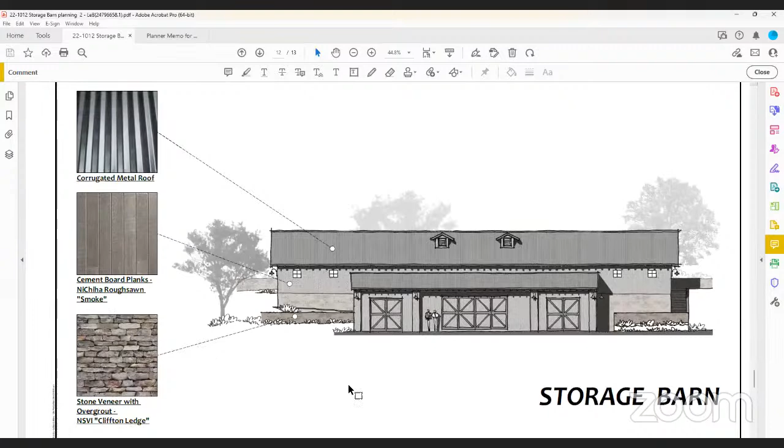This is fine, this is great. You can leave something like this in the drawings, but do take an additional picture of the color board and put it in. It's always a good thing to have it, because then we can touch base and make sure we're seeing the best representation possible of the materials.

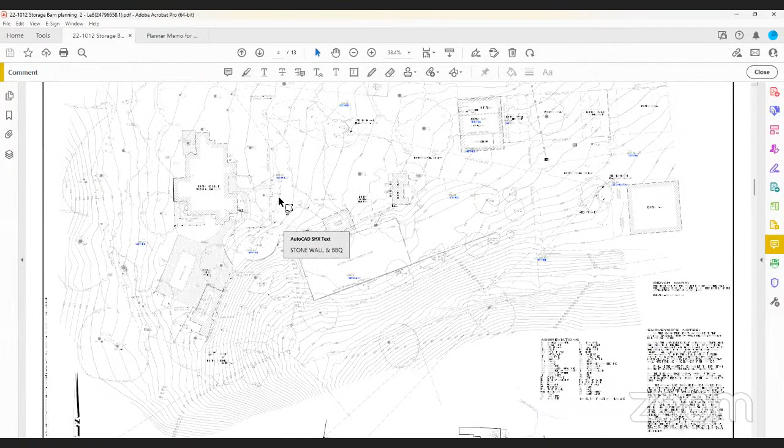Board, do we have anything else, any other comments? You need to note your lighting fixtures, and we're looking for full cutoff, dark sky compliant—we like those kinds of fixtures. We'd like to see a note about the Kelvin temperature of the lamp, whether it's incandescent or LED. We talked about including those other documents, and I think that's it. Did I miss anything, board?

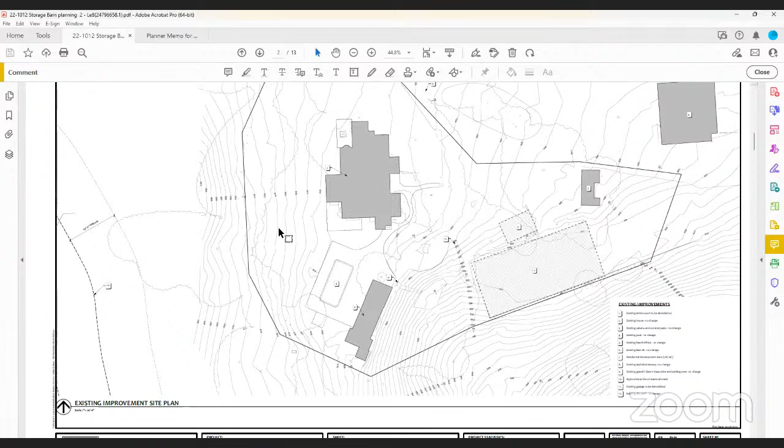Nicole asked: is it the direction of the board to return for preliminary and final at the same time then, with all that content? I'm comfortable with that—board, is that okay with you? Yes, yeah, I'm good with that. That's a sounding of support there. So Ben, go ahead—it is Ben, right? Yep. Okay, go ahead, we're more than comfortable seeing it return preliminary final.

Sounds good, full board, because we have to make the exemption. And then just make sure the package has all those bits and pieces and everything hangs together, and we'll be happy. Okay, great, thank you for your time. Thank you. Nicole, did you get all that? I think so. Okay, yay.

I'm glad my crazy weird day is not impacting everybody else any more than it is.

Okay, that was the last item. So Nicole, you want to share your screen, and we can review those comments for the 4 items. Yes, 1 second.

Host disabled participant screen sharing—Jonathan's got to let you in. Yep, there you are, you should be able to now. I always join twice, so... Oh, it might be the other one. Sorry, she can only share the screen from one of them. So I can use my headphones. Definitely, okay, see if—okay, that worked. Thank you.

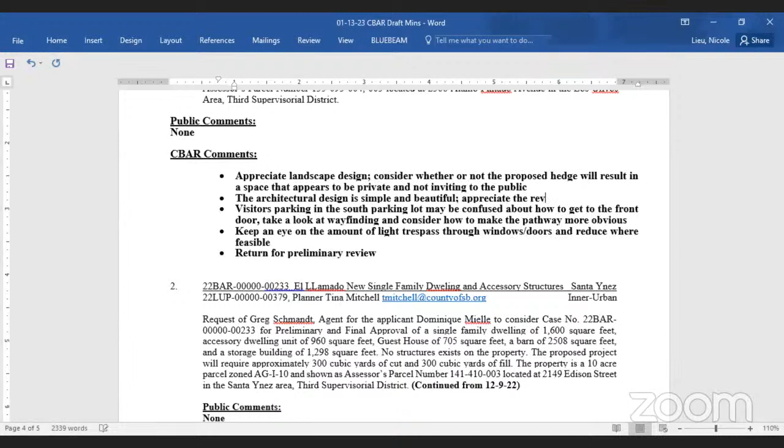Front elevation, or street elevation, whatever. It would be, I think it's Alamo Pintado elevation. Is that right? No. Yes, I'm confused today, that is right. But front elevation is sufficient. Okay, just leave that.

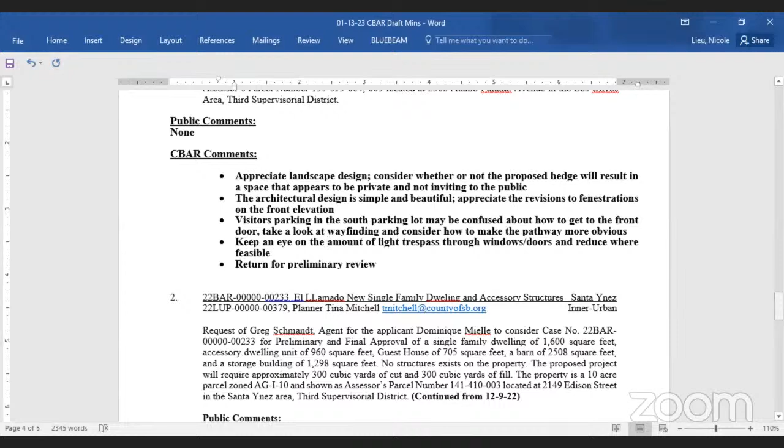Actually, one thing, instead of keep an eye on, I would say be. That's just like what we kept an eye on it, but no, we want. How about be cognizant of the amount of light trespass? Minimalize. Reduce, well it already says that. I guess we didn't necessarily say it exactly that way, but I said concern. How about concern about the amount of light trespass through windows?

I don't think that's actually right. I think that's what I was going for generally. Okay, be cognizant of the amount, because I think that captures the whole feeling of the board. Or could you say be sensitive? There you go, I think that's more what we were trying to say. How about be sensitive and reduce wherever possible, or something like that? It already says that, okay. Yeah, I see it, got it. Okay, all right, thank you.

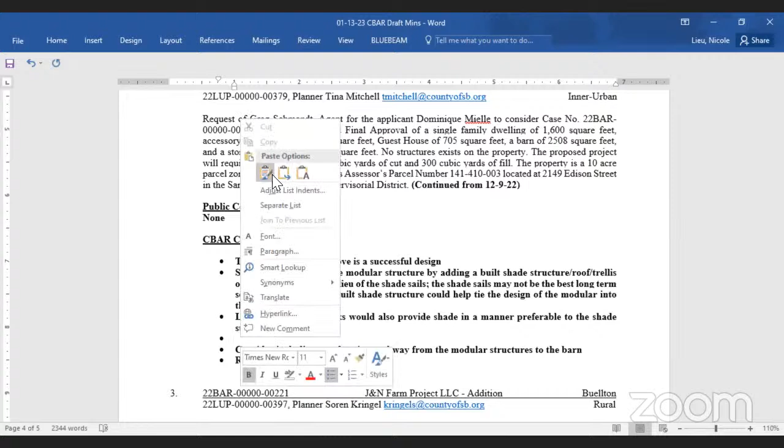One other comment just above there. I wonder if it would, I might feel a little more comfortable. It says a built shade structure could help transform the modular and help to tie into the barn storage structure. Help tie -- is that acceptable?

Not tie into, but tie to. Or relate to. Help. To me, it's more about the transformation of the modular than it is about making it look like the barn. Right, yes, it's not about the barn so much. I just think it's more about transforming that structure into something a little different.

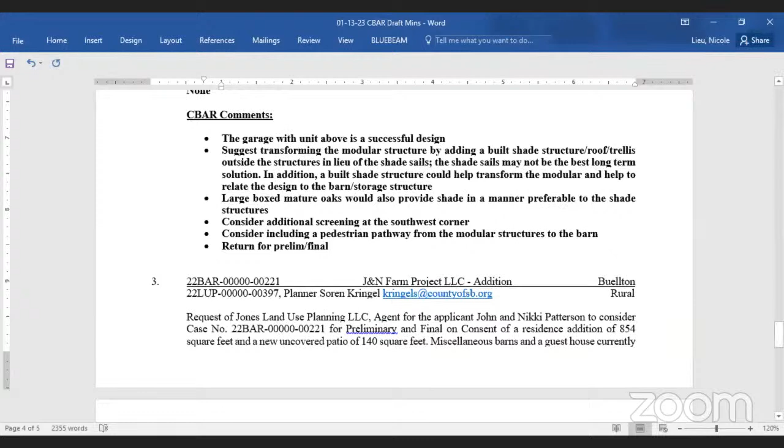Maybe the overall -- relate the design to the overall property. I think multiple people were talking about tying the two architectural styles together in some way, not making them the same, but making a more cohesive site. So I'm good with this if everybody else is. I'm comfortable, anybody else? I'm good with it. Okay.

Okay, that was preliminary final, we got that one. You should make a note -- I don't know if it's you or Jonathan who needs to note that the motion included the 2700 Kelvin. Yeah, I'll make a motion. Did you want to put who made the motion and who seconded? No, she doesn't do that, that's Jonathan. Oh, okay. That's why the minutes sometimes look like two people did it -- it's because two people did it. Okay.

Okay, we will probably need to spell out for the final that the board supports the making of the finding of in the interest of good design. You might want to make a note to yourself to put that language in there, the exact language from the ordinance. Yes, I'll do that. Instead of trying to recapture it, we can just say we support making this finding.

Return with -- it wasn't that this implies that they didn't have a full set of plans.